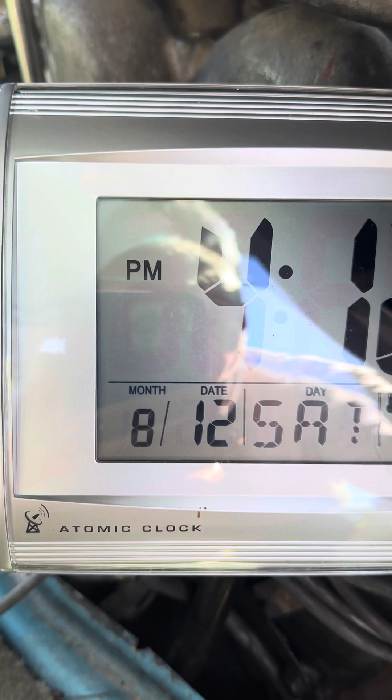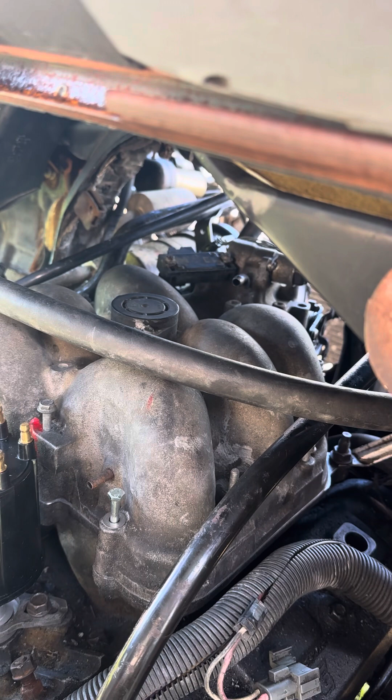In this video log today, I'll be putting on the General Motors 1992 to 1995 RPO L35, VIN number W, upper intake plenum. I have to caution everybody watching, I have dual air on this van and this AC line is in the way, so to get the upper plenum on and off, I have to tilt it at an angle so it doesn't snag and destroy the fuel injection electrical connector.

This is a VIN W RPO L35 engine with central multiport fuel injection. They call it a CPI because it's central port injection. It does all 6 poppets, and the computer fires about 3 times per revolution. Every time the crankshaft goes around 360 degrees, it fires about 3 times in pulses that go to the maxi injector, allowing it to squirt to all 6 poppets.

This thing's real finicky in the first iteration, and they replaced it with another iteration after 1996, when they came out with sequential firing poppets, which required wiring to each poppet and a different computer. So there's a big difference between 1992 and 1995 models.

This video log is not a how-to, I show you my mistakes. Today we're going to be reattaching the upper intake plenum. I think I've given you enough cautions that you lift the front and the back several times when getting it in and out, to make sure it doesn't snag on the electrical connector, because that connector is very expensive now.

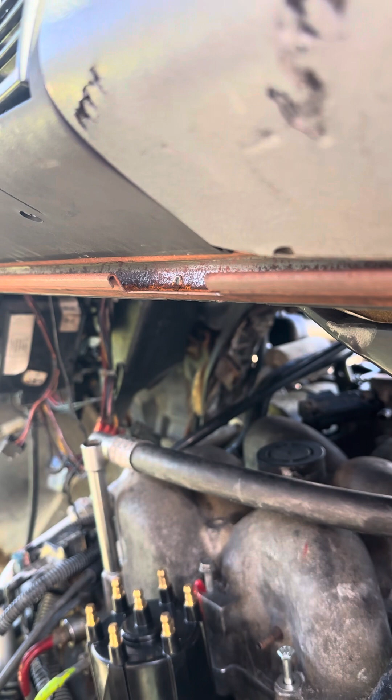I've got two more cores I'm going to send off to Injection Masters in Washington State, and I'm going to send another one to GB Remanufacturing, because I'm an Astro van enthusiast and I foresee a need for these spiders for years to come if I'm to keep these older Astro vans in service without swapping to the V8, which is an option everybody seems to love. But I want to keep this a stock V6 because it's all I need for the work I do with it. I'm trying to do the upper plenum, and I've prepared for this.

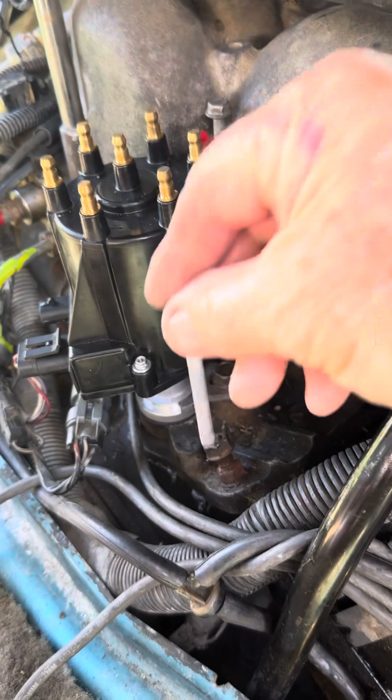I don't like some of the bolts used for the upper plenum, so I'm doing some research to replace these with ones like this. To my mind, this one was too short, not long enough to satisfy me, so I put in a longer bolt. But it doesn't have that nice flange-type head like you see on the original.

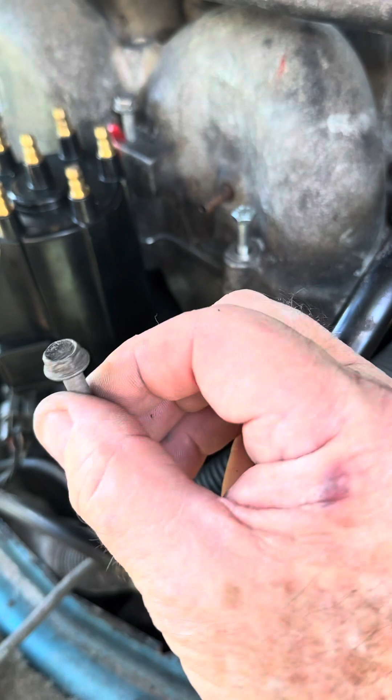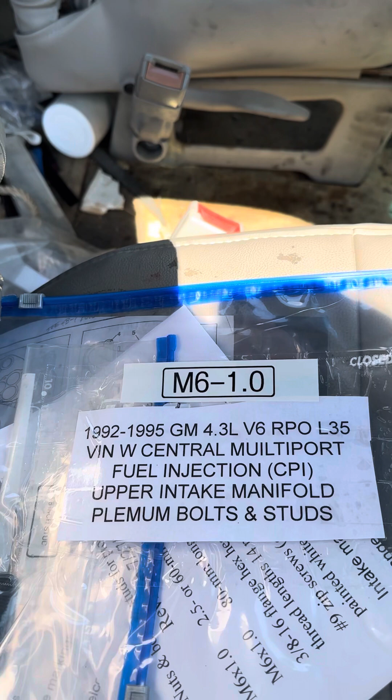So I'm going to try to get some of these somewhere in the world. If anybody knows where I can get this, I'd appreciate if you post a comment. It's an M6-1.0 thread pattern, and this was used on 1992 to 95 models.

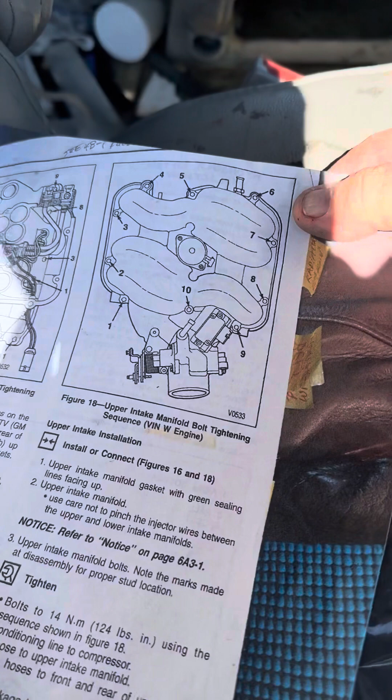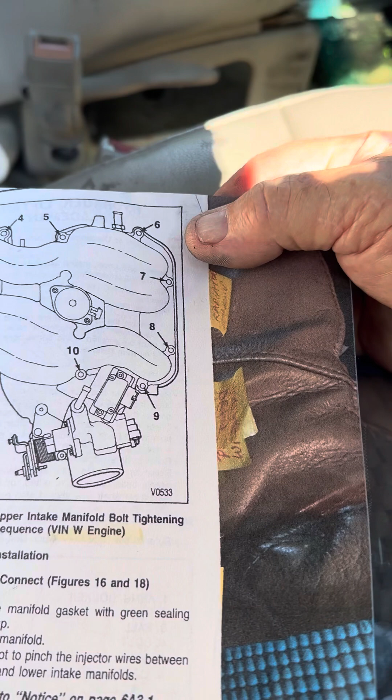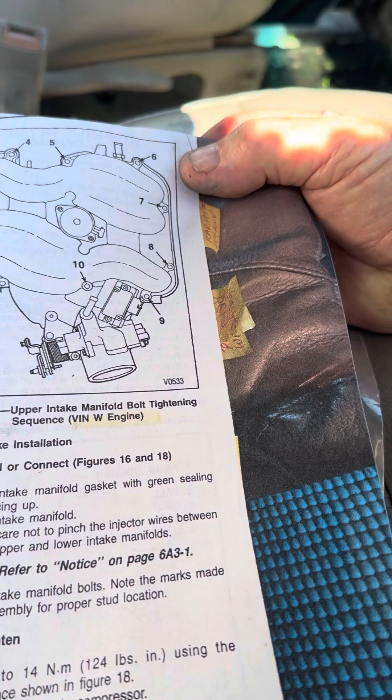Now you see I've staged my notes here to prepare for this operation, and I've taken a photograph out of the service manual with the tightening sequence, 1, 2, 3, 4, 5 through 10, I think it is, so I don't miss a bolt, because a couple of them are hard to see — number 10 is one of them. It gets torqued down to 124 inch-pounds, or 14 Newton meters, according to the service manual.

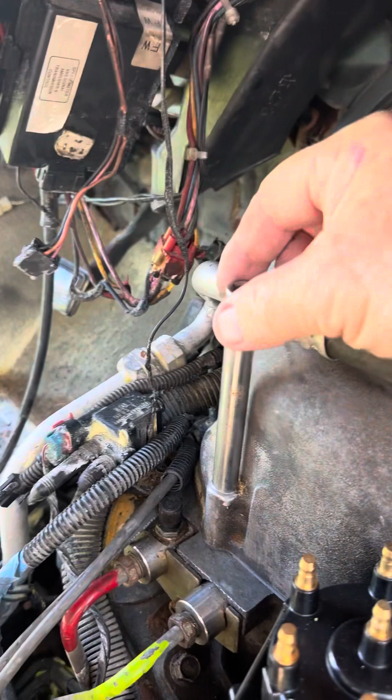And I've got other excerpts here that I've done by blowing up things and taking pictures. In my videos, when this is converted from a video log into a video production, I'll put my references to all these service manual pages and my notes and research at the end of the production, so those of you who watch to the bitter end will get the benefit of my research. Anyway, having a super long 10 millimeter is handy to start with.

And then you need something like an E6 for these two Torx studs in the back that have a Torx head, and some notes. I'm having trouble talking, but anyway, I try to pre-stage everything so when I start working, everything's at my fingertips and I don't get upset when I can't find things. One of the things you're going to need is these Torx bits.

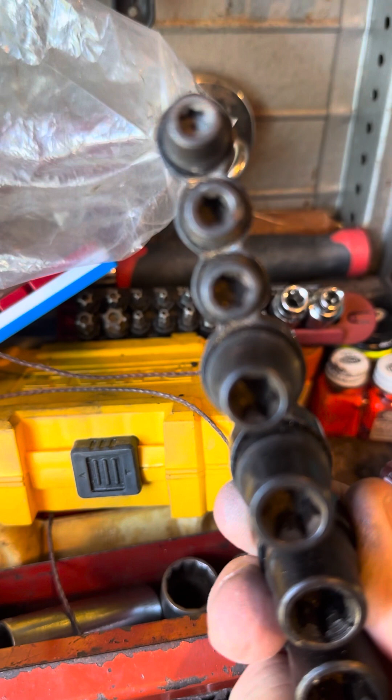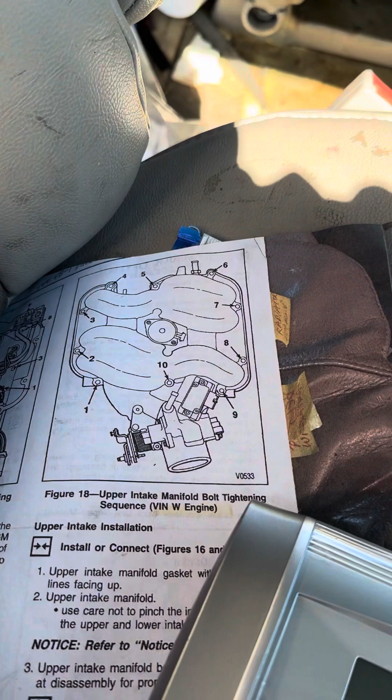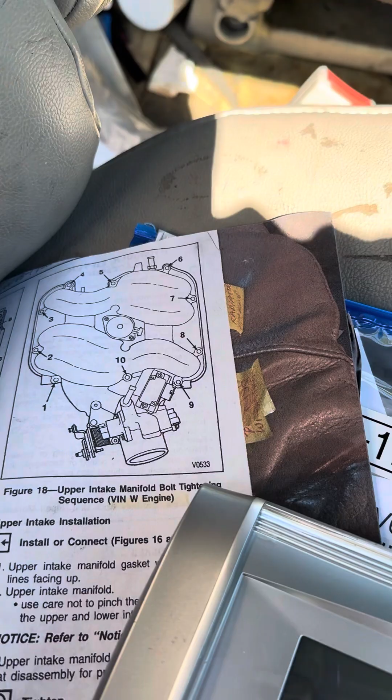The smallest one fits the last two studs, on the driver's side. Those two studs are number 2 and 3 — so it's 1, 2, 3, and these just go around in the pattern 1 through 10. But it's not 2 and 3; when you look at the pattern, the two that are studs are 7 and 8. So I have to orient this so my diagram is the same way as the front of the engine. That's backwards — that's the back of the engine. So I don't make mistakes when I'm working.

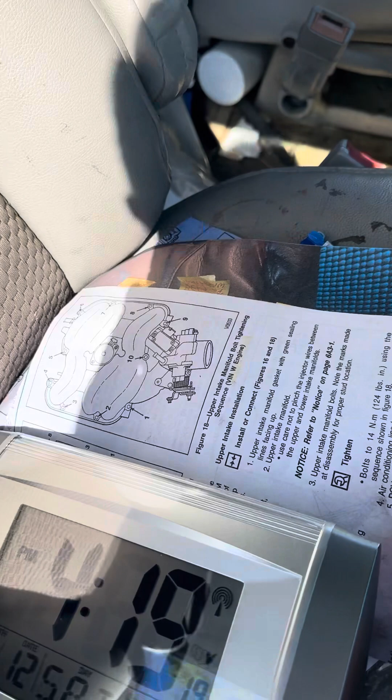There's an in-tank fuel pump that has to put out at least 62 psi as measured at this fuel injection port, otherwise the damn thing just won't run well. And when the engine doesn't run well and the transmission doesn't like it, this whole powertrain — its heartbeat is the fuel injection. You've got to get it right. No matter how many parts you have to change, it has to meet specs.